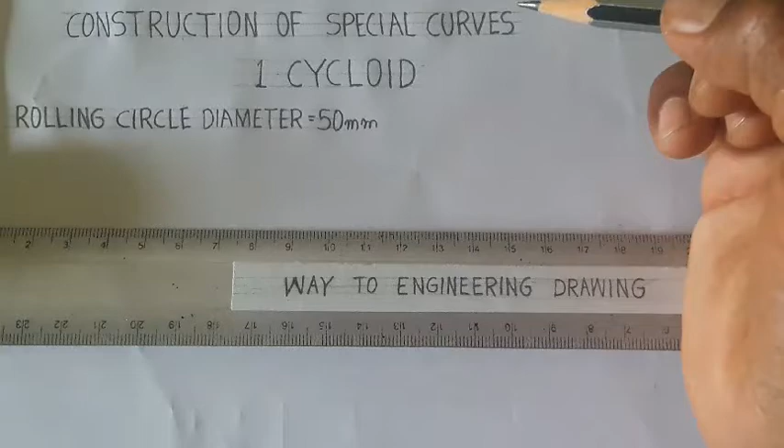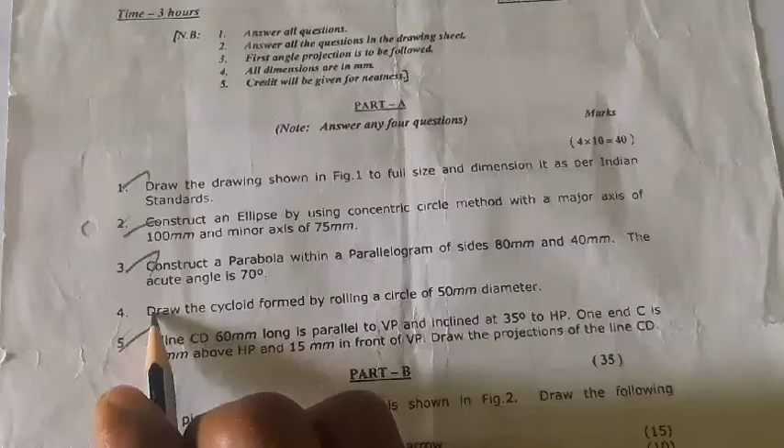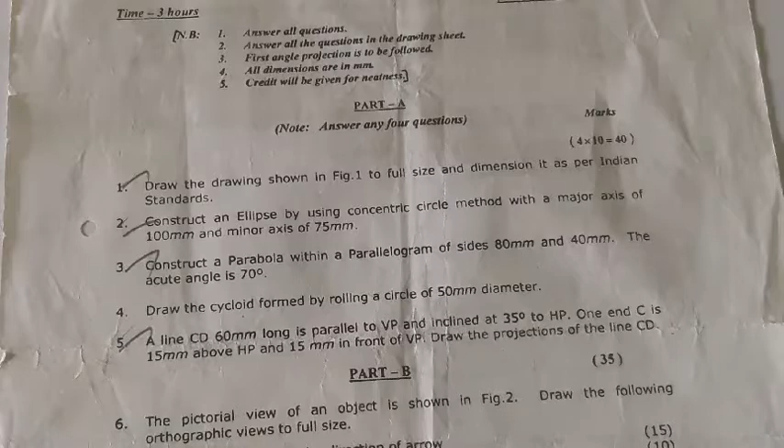The question is asked like this: draw the cycloid formed by rolling a circle of 50 mm diameter.

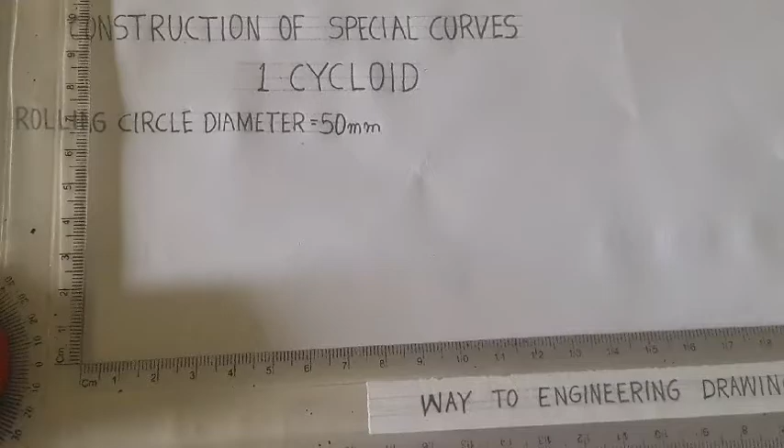The given data is rolling circle diameter 50 mm. How to draw cycloid? Diameter 50 mm means we take the measurement in our compass as radius 25 mm.

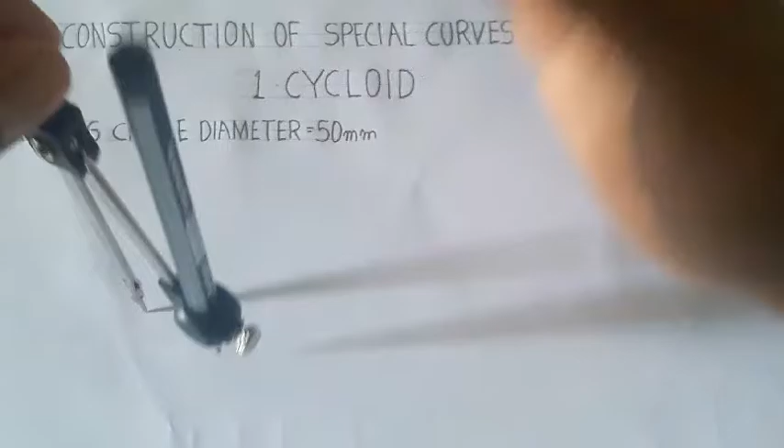Take the midpoint, draw the rolling circle with diameter 50 mm. In our compass we take the radius as 25 mm.

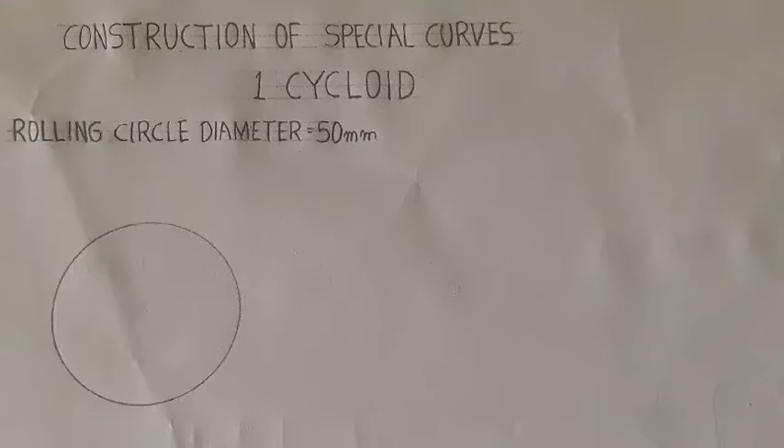This is the center point. We draw a vertical line in our circle and draw a horizontal line in our circle, through the midpoint. Name this as center C.

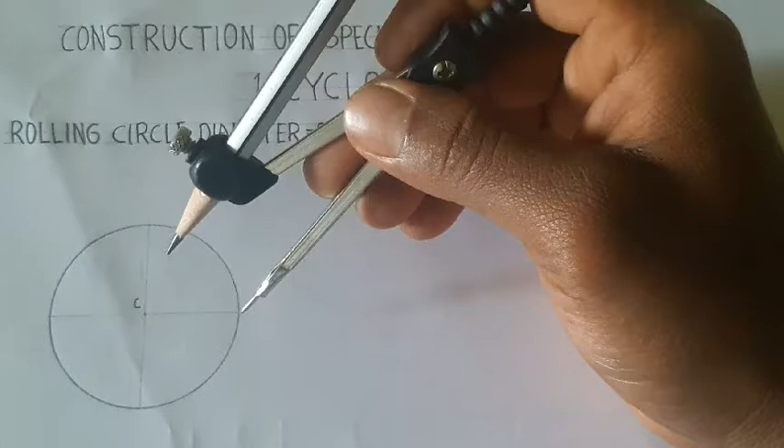Next, we already divided the circle into 4 equal parts. Now to trace the cycloid, we divide it into 12 equal parts, using the same 25 mm radius.

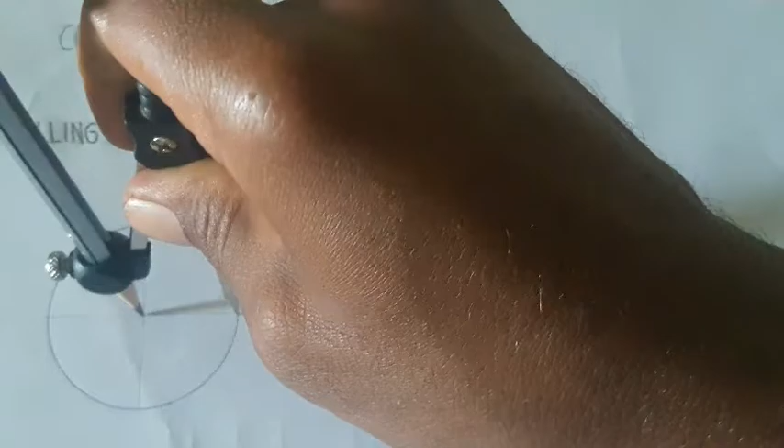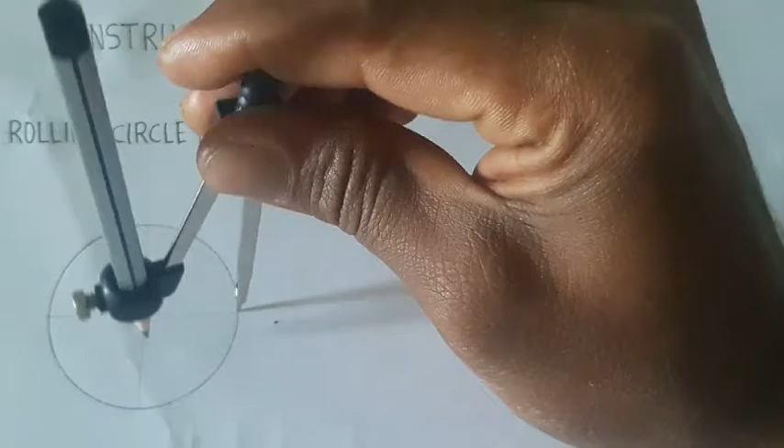Put the compass nib here and draw an arc from here to here. At the same time place it on this side and draw an arc in our circle, from this point to this point. Now we join these points.

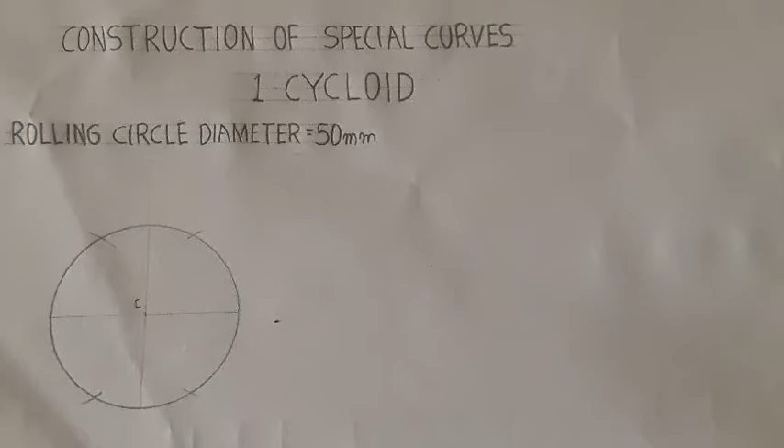From here to here through the midpoint, and at the same time from here to here.

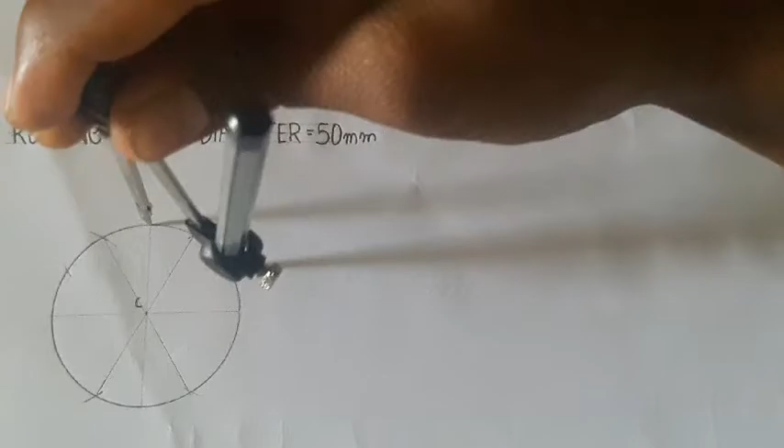Next we place the compass at the top of the circle and draw arcs on this side and this side. At the same time we place it at the bottom of the circle and draw arcs here to here, then join these arcs.

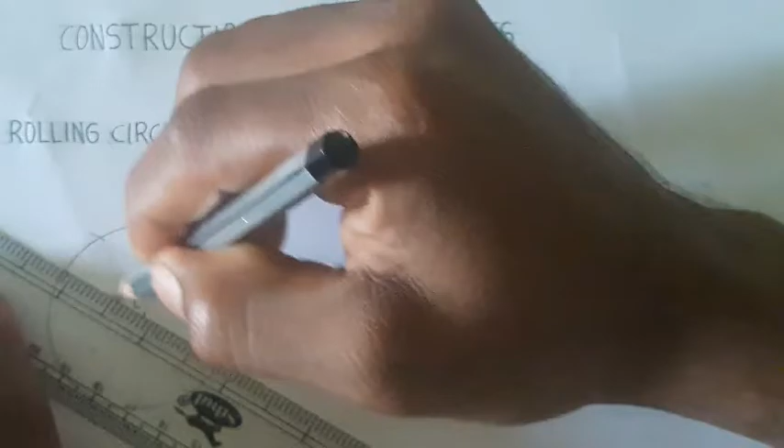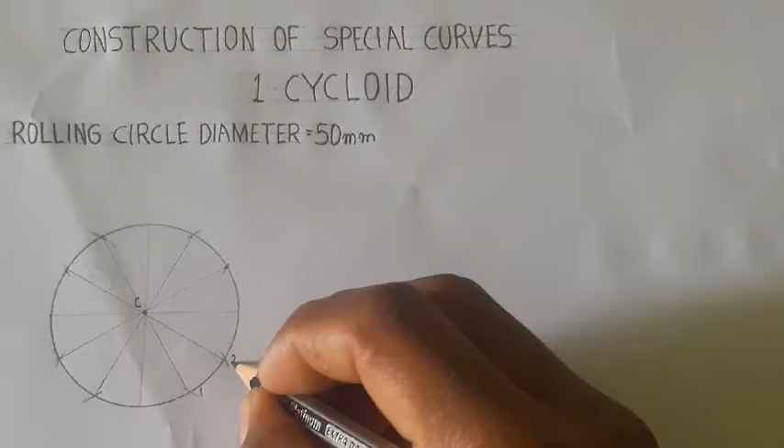We got 12 equal parts. Name the points as 1, 2, 3, 4, 5, 6, 7, 8, 9, 10, 11 and 12.

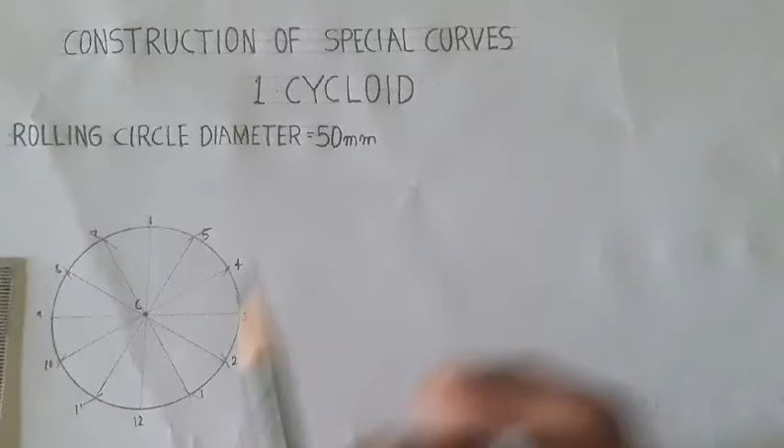Next we draw the rolling circle length. There is no length given in our question. How to find it out: using pi into d, or pi into r square.

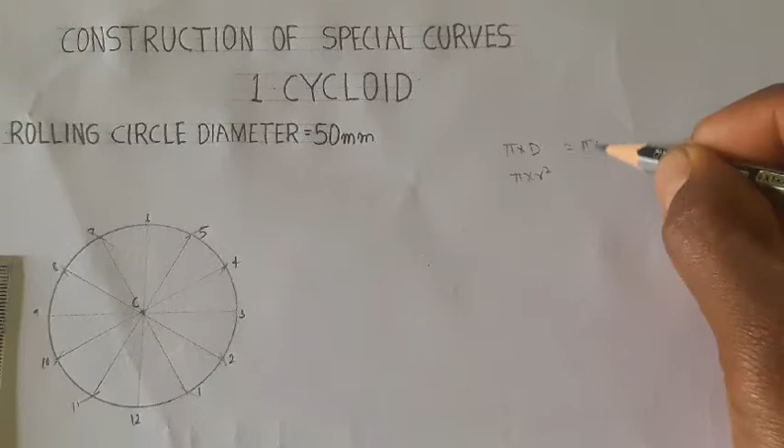Pi into d means, in our calculator, pi into diameter value 50, we get 157.07. Take the measurement as 157 from here.

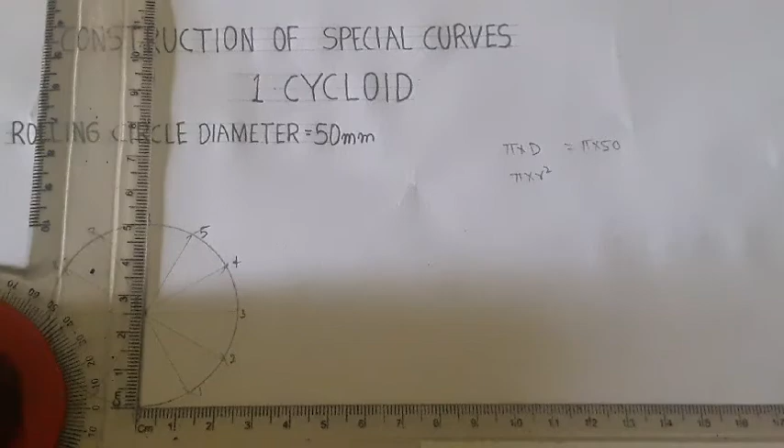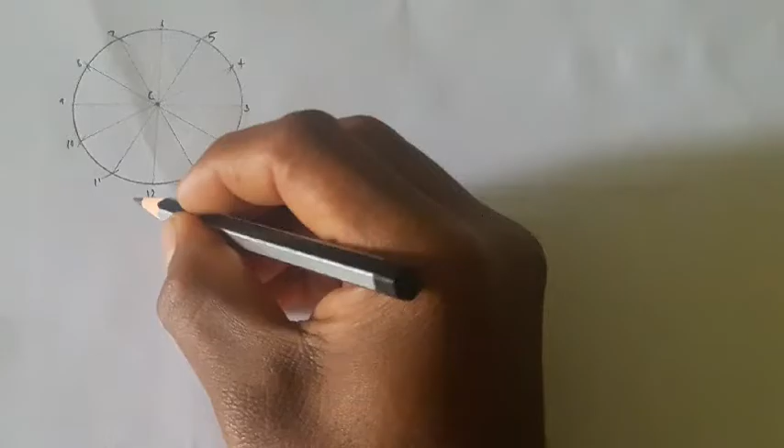Here we draw the line horizontally, measuring 157. Put the point as point P and this as point Q.

The Q point is obtained using pi d or pi r square. This point to this point means pi d.

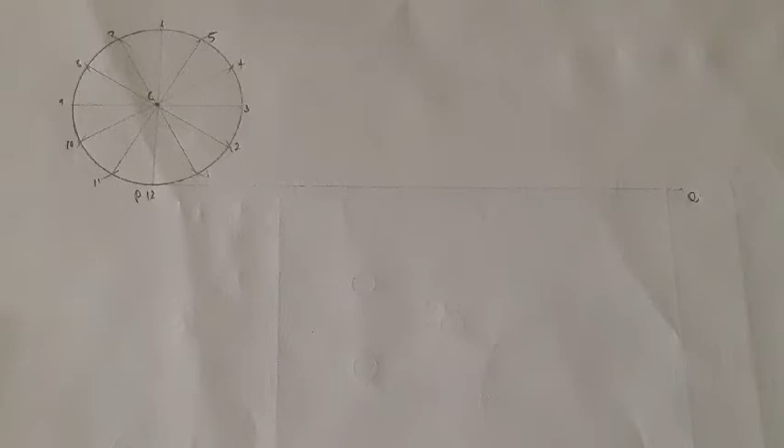Next we divide the line into 12 equal parts. This is the simple procedure for dividing the line: take the midpoint, take the protractor, mark 30 degrees. Draw a line from point P at 30 degrees in our scale with the same length 157, and mark this point as Q dash.

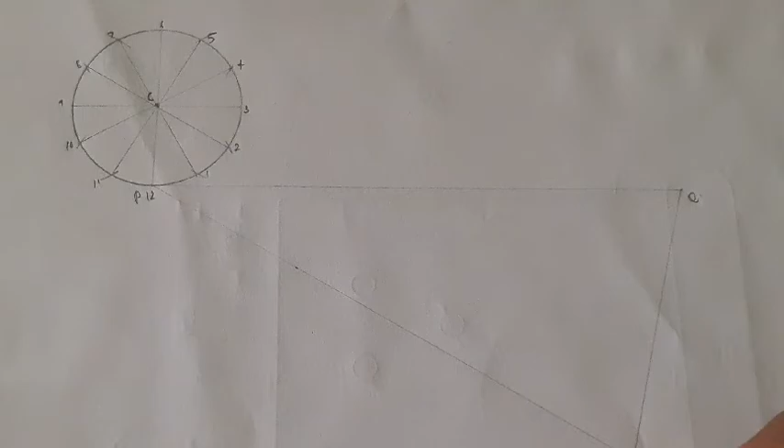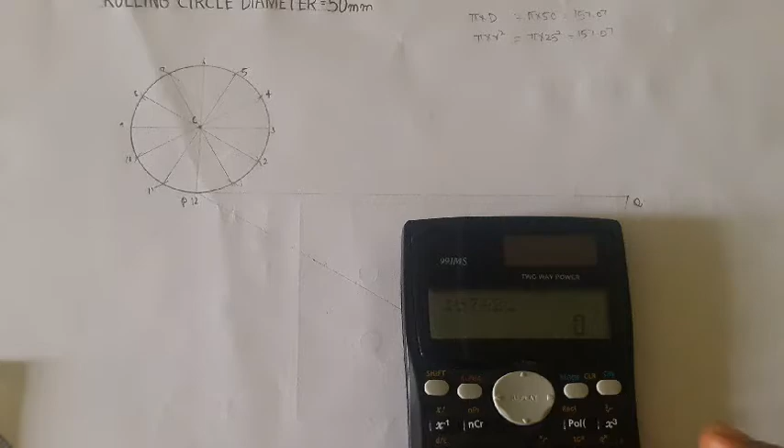Now we divide point P to Q dash into 12 equal parts. The length P to Q dash is 157, divided by 12 equal parts gives 13.08. Take the measurement as 13.08.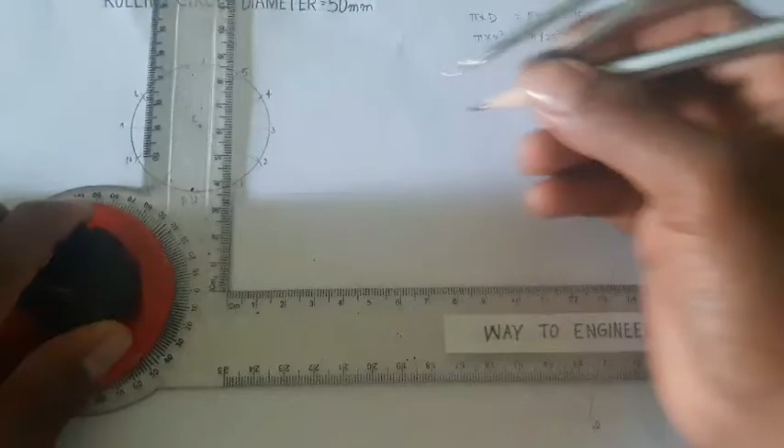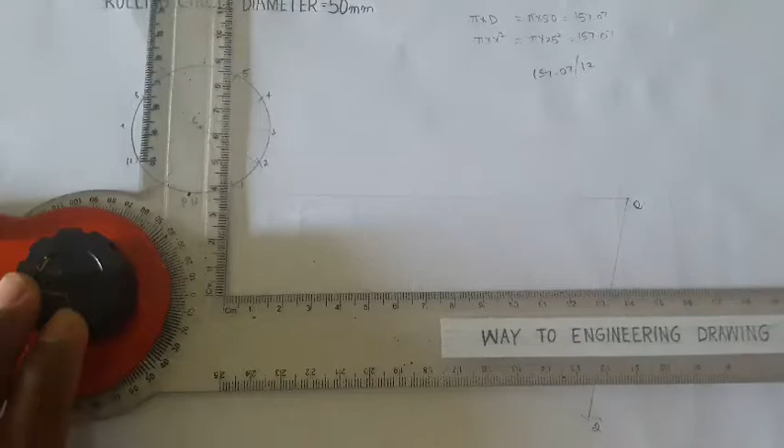157.07 divided by 12 equal parts gives 13.08. In our compass take this measurement, rounding off nearby to 13 mm.

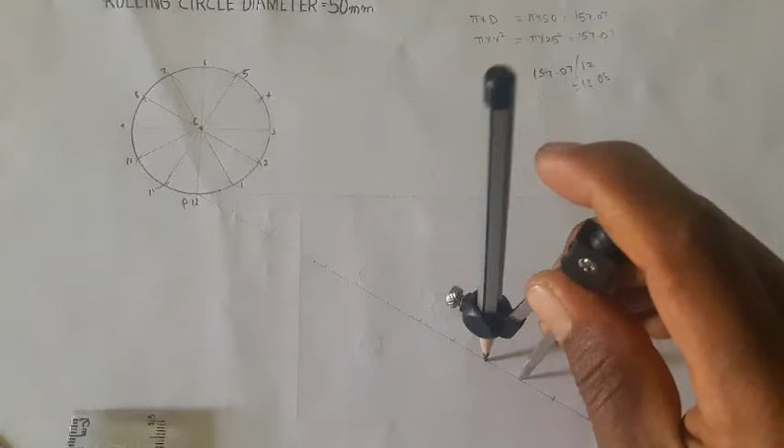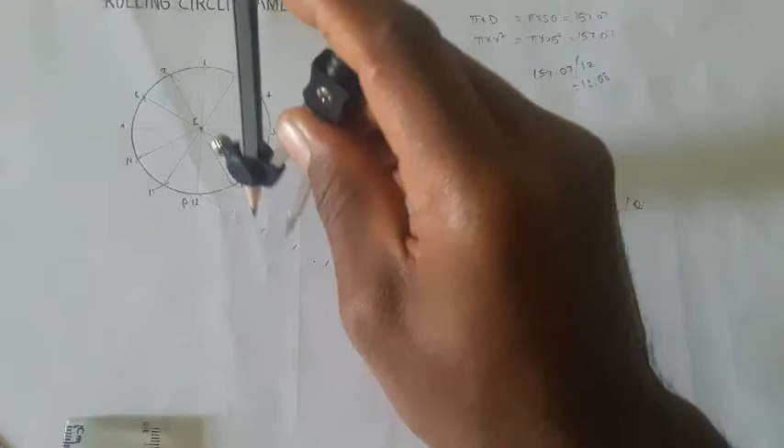From this point mark 1st equal part, 2nd, 3rd, 4th, 5th, 6th, 7th, 8th, 9th, 10th, 11th and 12th equal parts. Name the points as 1 dash, 2 dash, 3 dash up to 12 dash.

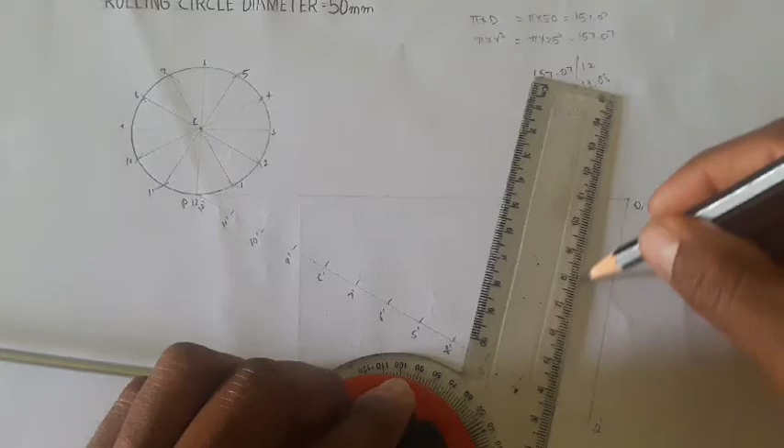We already joined Q to Q dash. Now we join the points from here to here, setting the scale parallel to these lines.

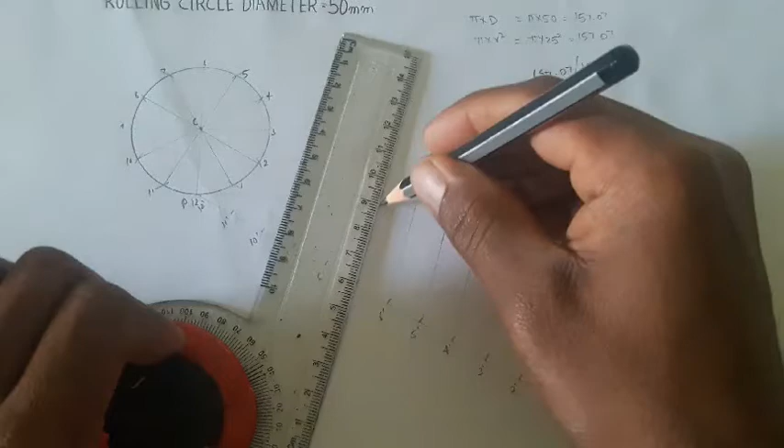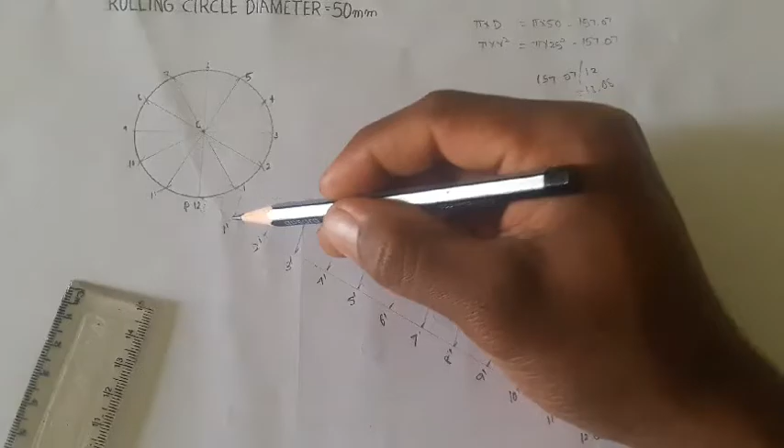Draw the lines 1 dash, 2 dash etc. parallel to the line point P to Q. We change the points 1 dash, 2 dash, 3 dash, 4 dash up to 12 dash, where 1 dash means point 1, 2 dash means 2, 3 dash means 3, 4 dash means 4, 5 dash means 5, 6 dash means 6, 7 dash means 7, 8 dash means 8, 9 dash means 9, 10 dash means 10, 11 dash means 11, and 12 dash means 12.

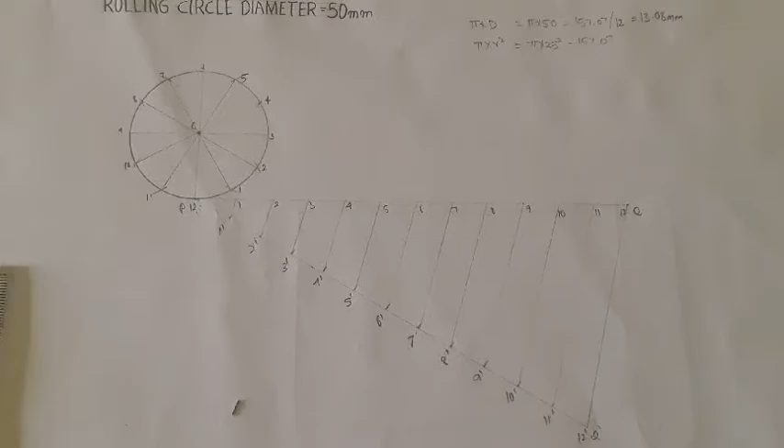Next we join this line from here to the same 157 measurement, and we join this with the 50 mm circle diameter.

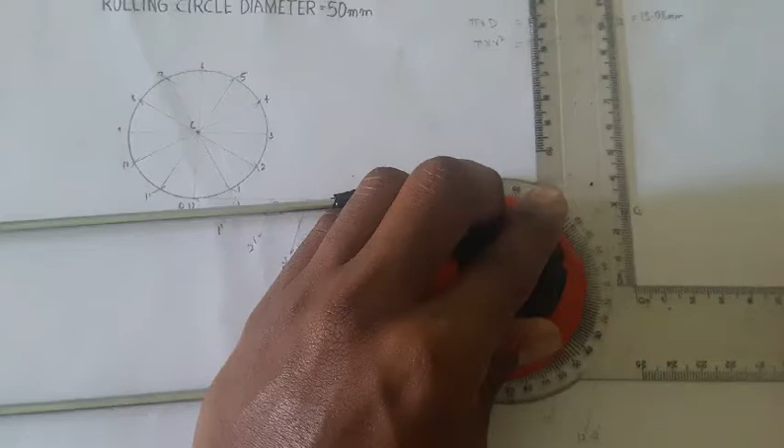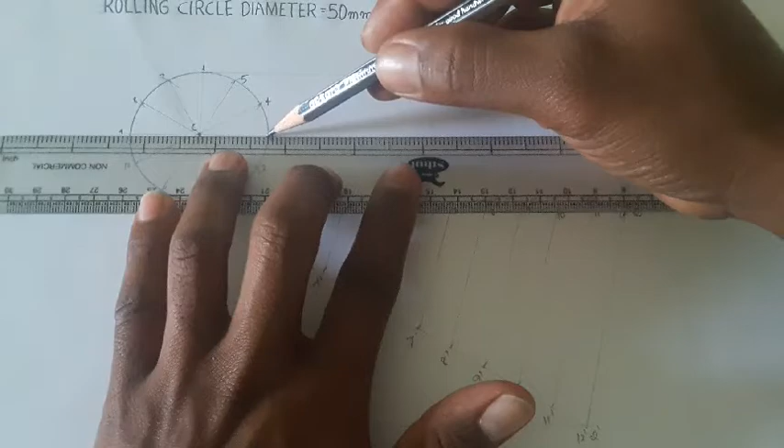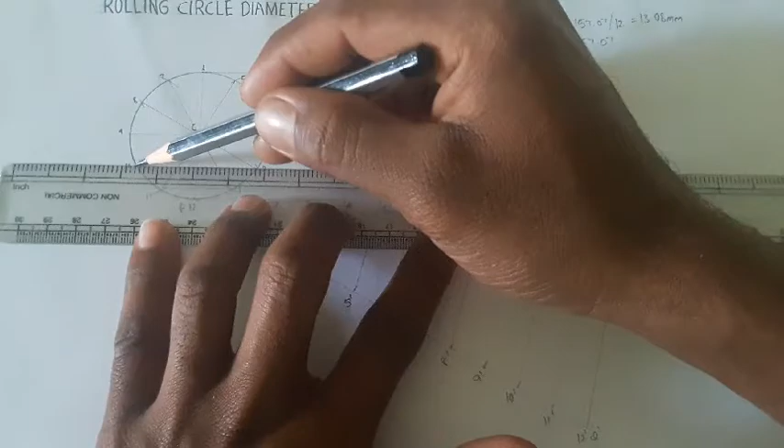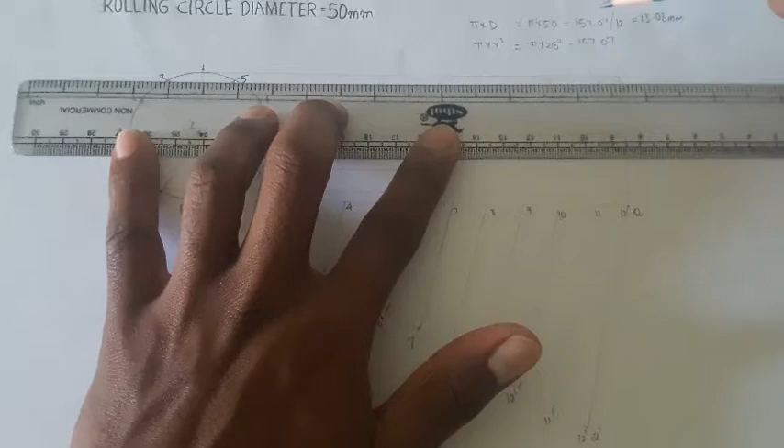Okay, same as this is the center, 9 to 3. The 9 to 3 line is this to this, and from the base, 1 and 11. This is the 1 and 11th point. This line is named as the 10 to 2 point. Already we get the 3 to 9 point, and this is the 8 to 4th point, and this is the 7 to 5 point. Already we got the 6th line, look like this.

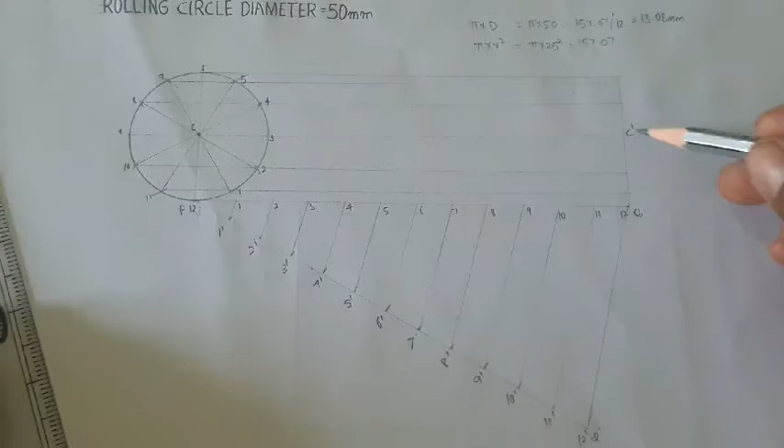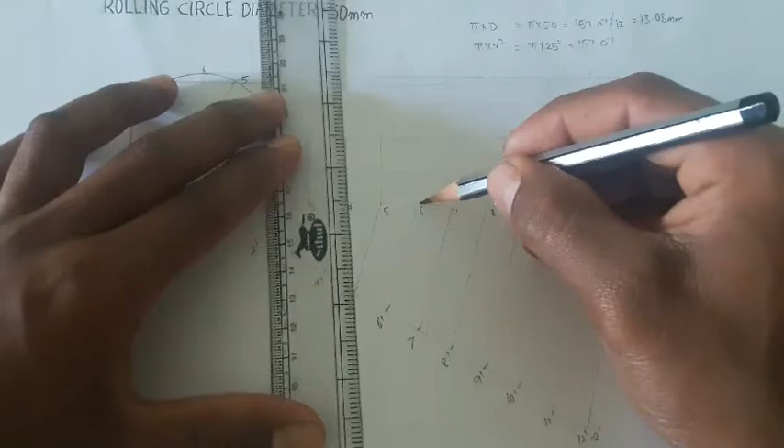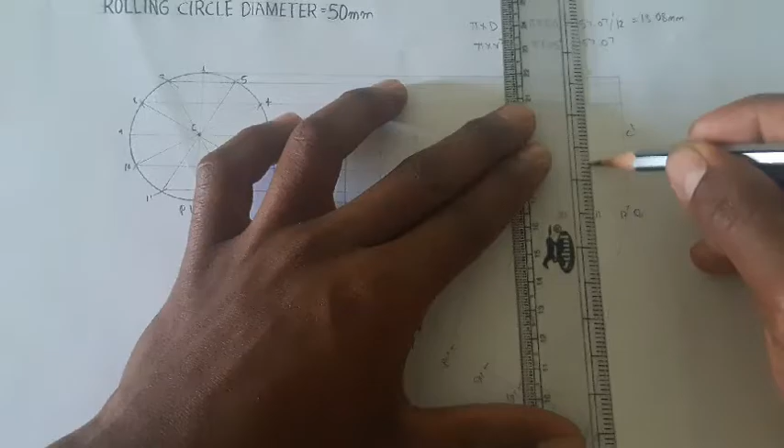Next we join these lines vertically, the point C to C dash lines. Look like from 1 to C point line, 2 to C point line, 3 to C point line, 4 to C point line, 5 to C point line, 6 to C point line, 7 to C point line, 8 to C point line, 9 to C point line, 10 to C point line, 11 to C point line, 12 to C dash. Name the points as C1, C2, C3, C4, C5, C6, C7, C8, C9, C10, C11 and C12.

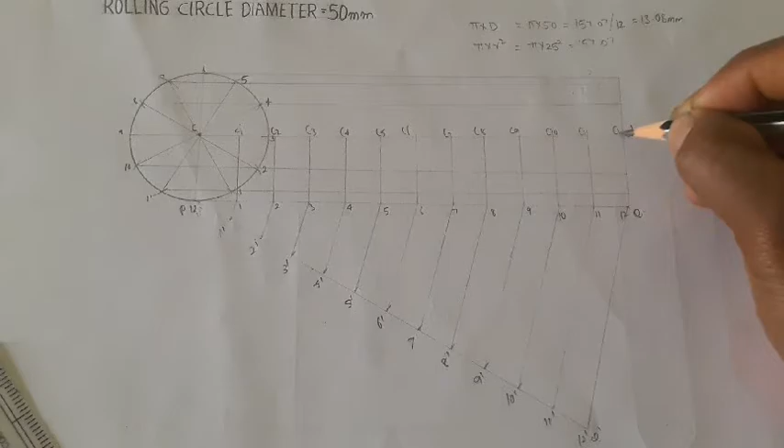Next we take our compass radius as 25 mm, this to this point.

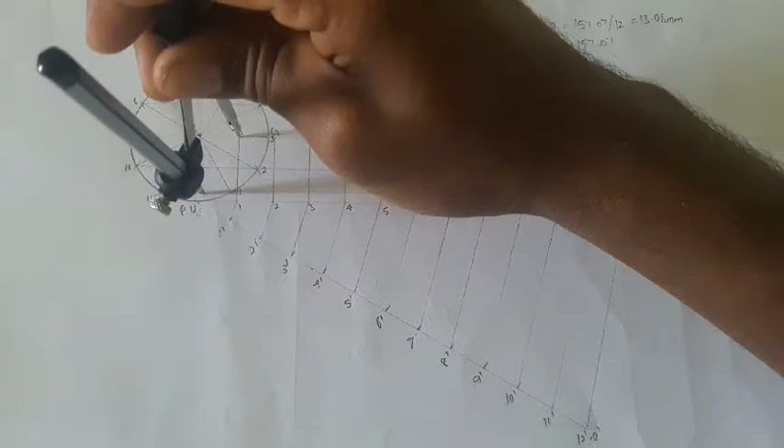Now we take the center as C1, intersect the 1st line. Next locate the C2 point, intersect the 2nd line. 2nd point is here, 2nd line goes here, we intersect this, this is the 2nd point. Next we locate C3, this is the C3 line.

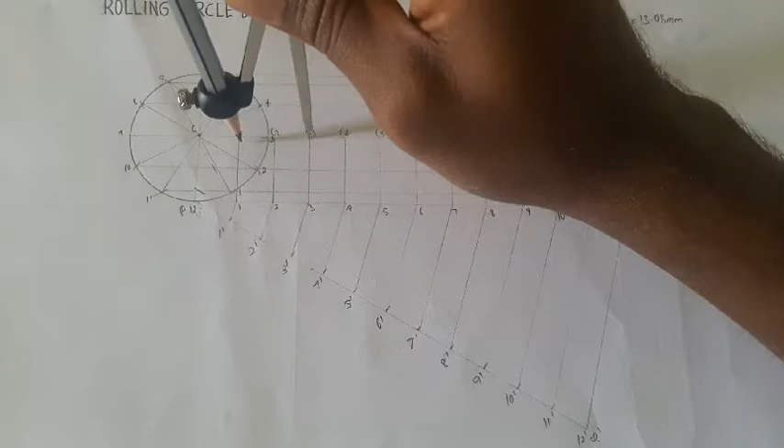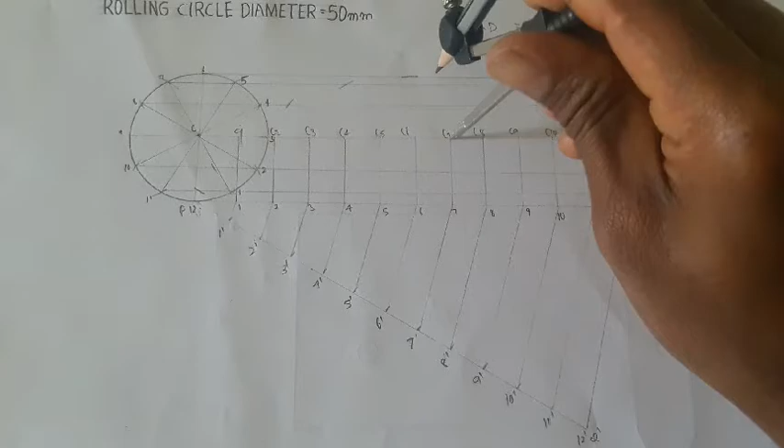Next we locate C4, this is the 4th line. Locate C5, this is the 5th line. C6, this is the 6th line. C7, the 5th and 7th line. Already we draw the arcs on this side, 7 point mean, look like this.

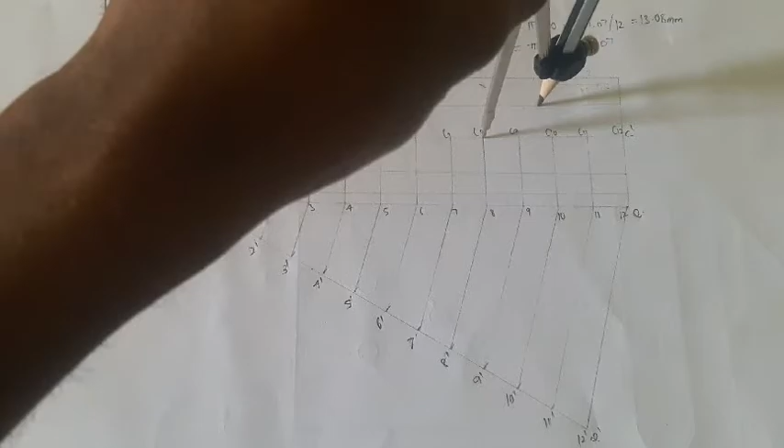Next we go to the C8 point, the 8 point line is this, the 8 and 4th point line. This is the 4 and 8th common. 9 and 3 as common, so this is the 9th point. Next we see the 10th line here, 10 and 2 are common.

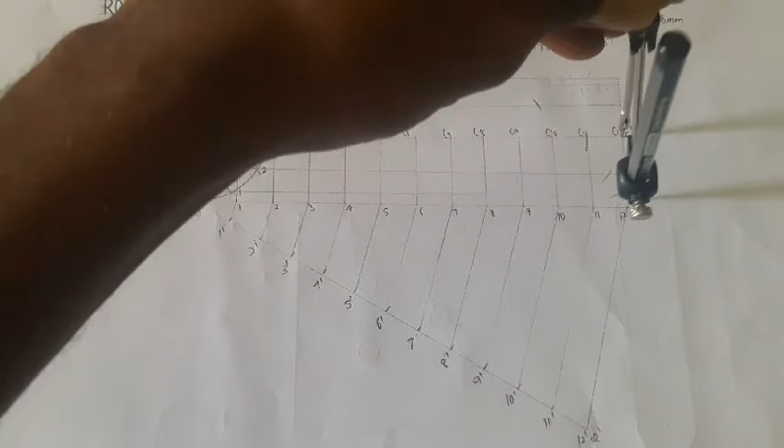10th mean we locate this point, this is the 10th line. Next C11 point, this is the C11 and 1 point, same as. Already 1 point we draw the arc. This is the 12th point, 12th point to this last point.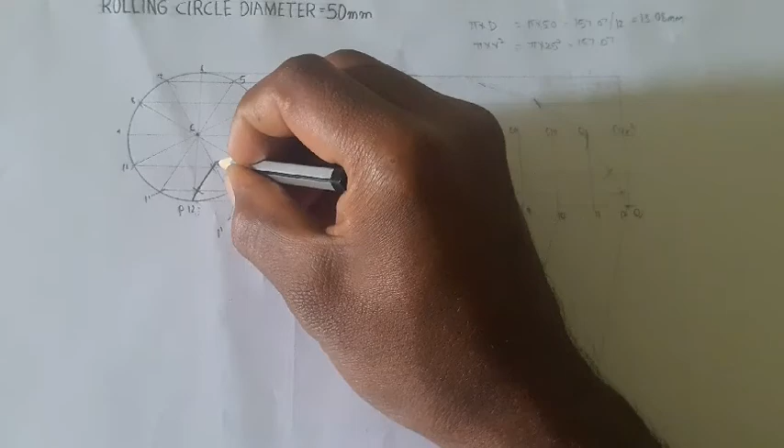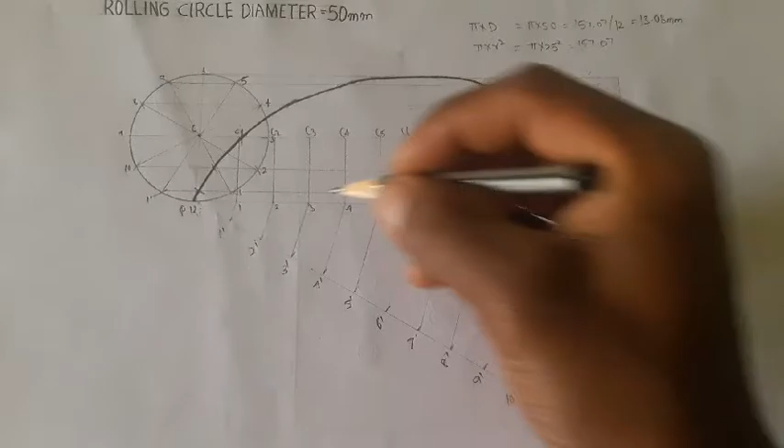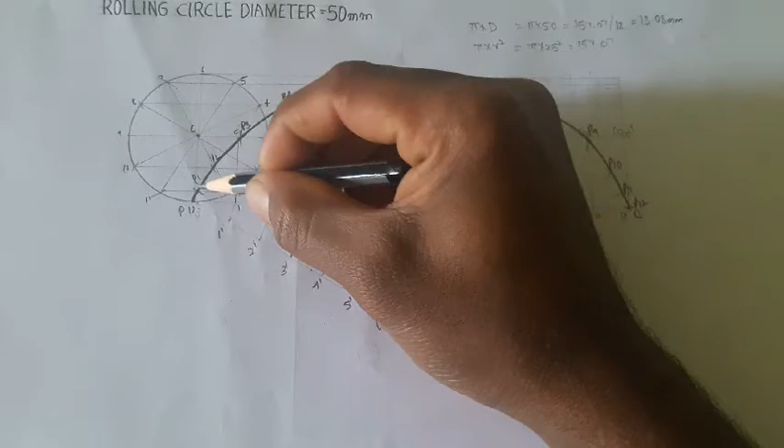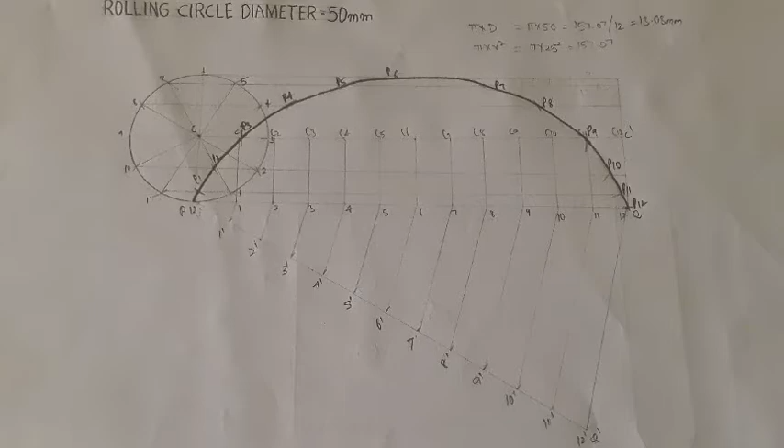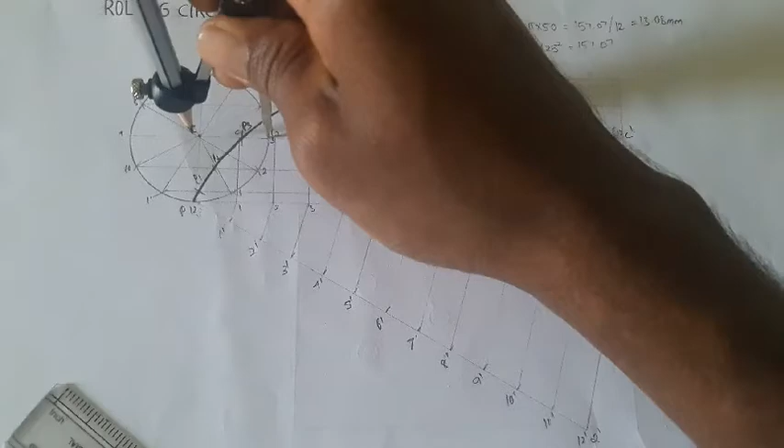Next we draw the tangent and normal at any point on the curve. How to draw: mark any point on the center line, we draw the line, draw the imaginary circle, take the same radius, 25 mm, place this compass here, we generate the imaginary circle.

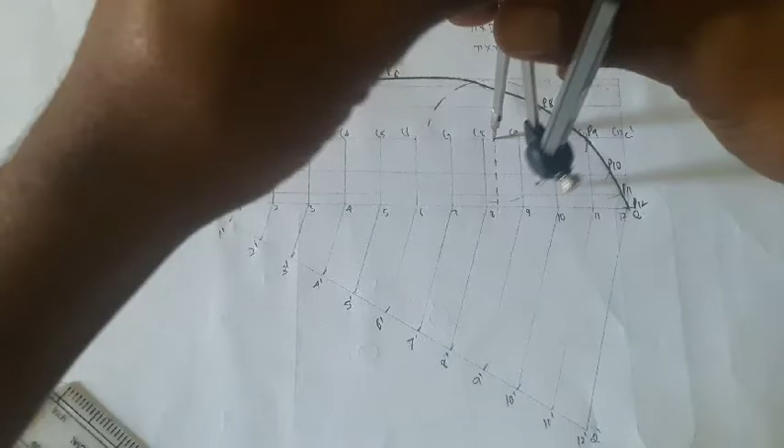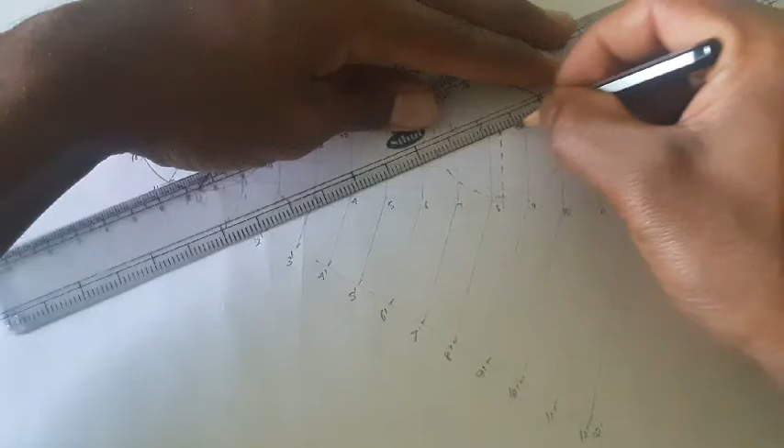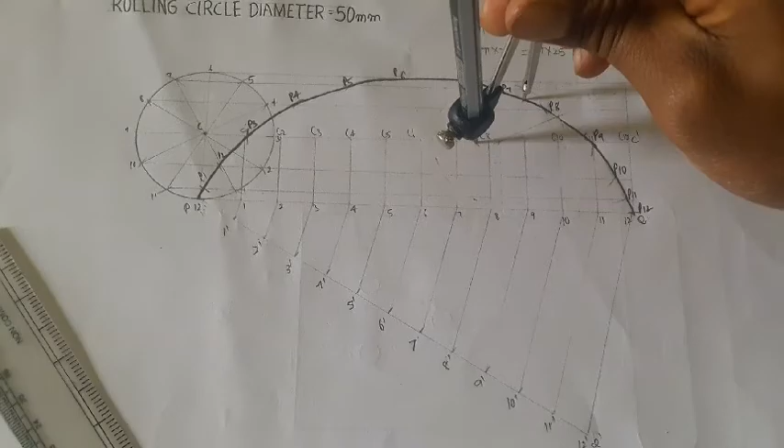The circle and curve meet here, we join this point, this is the normal point. Some mistakes, once again we recall, we mark any point on the curve, take the radius as 25 mm.

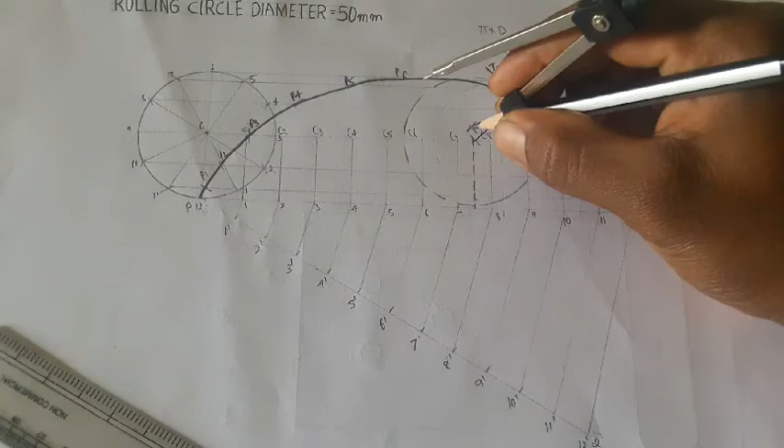Draw the imaginary line to this point, same as take the midpoint here, we draw the imaginary circle. Automatically meet the, we mark the point here, this point to this point is the normal point. Next we draw this point to this point as tangent point T1 to T2, and this is the normal point, N1 and N2.

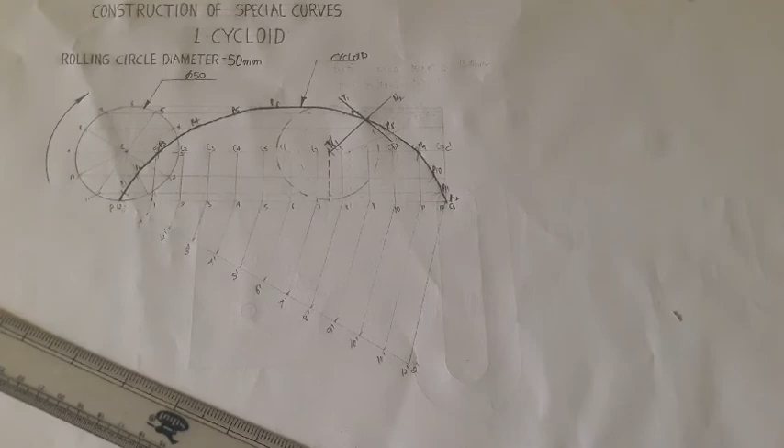This is the rolling circle, diameter 50. This is the cycloid curve, this is the rolling circle direction, this is the cycloid. The cycloid curve is widely used to design dial gauges and gear tooth profiles. Thanks for watching.